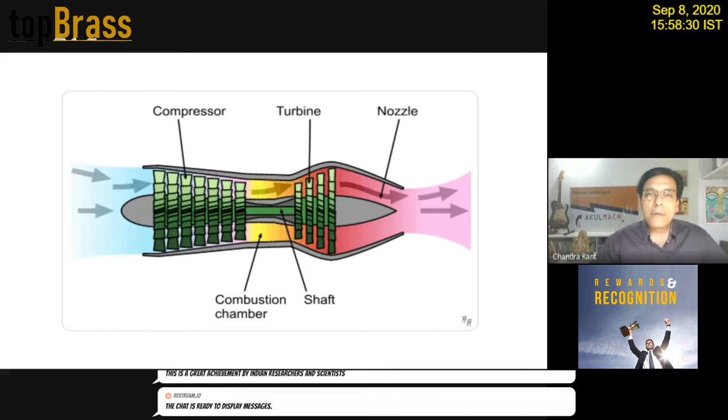How is this speed achieved? But before we go to the hypersonic drive systems, let me tell the viewers that the whole thing is based on something called scramjet. So what is a scramjet? We will come to that in a minute, but let us understand how the normal aircraft turbine engine works. So as you can see here in this diagram, this is a very simple diagram of a jet engine.

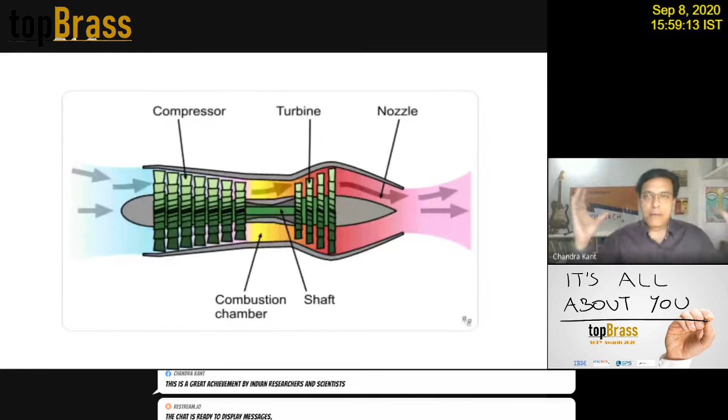It has something called a compressor at the start of the airflow. As you see when you fly using jet planes, there's an engine with a big frontal side as an entry point for the air. So this is exactly what it is.

The air enters from here, and these are the compressors. These fans operate in different stages, and as the air passes from one to the other, the rate at which compression is required increases every time it passes through the stages. So this is the low compressor, and as the air passes through all of this, it becomes high compressor, and the last one is the highest compression. So you can achieve a very high compression of air inside the engine.

Now, as shown in the diagram, there is a combustion chamber. The fuel is injected here and it is ignited. Once the fuel is ignited, it expands vigorously, and hence it escapes from the other side. So this is really the heart of the jet engine, and this is how the jet engine works.

It's a very simplistic diagram, but it has a lot more to it which we are not covering. As the hot air is escaping the engine, there is something called a turbine. These turbines are connected via a shaft with some of the compressors. So they spin the turbines, and once the turbines are spinning, they are connected with this green colored shaft to some of these compressors.

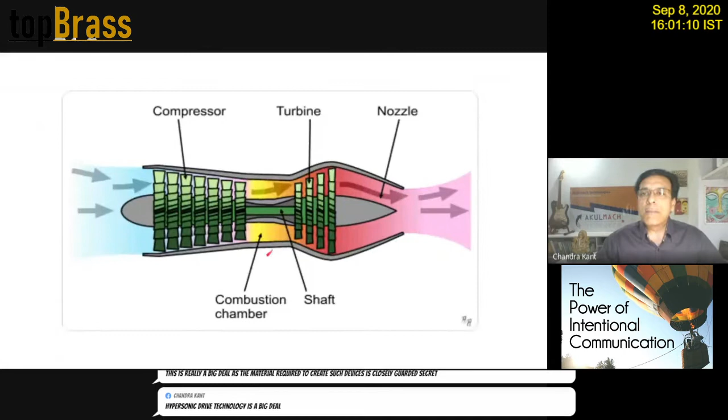So this jet engine, once it attains a certain speed, becomes a self-sufficient system, meaning it does not require any external help. The incoming air gets compressed automatically as long as you keep injecting the fuel and igniting it. The jet engine will keep running once it attains a certain speed. So this is a very simple diagram of a jet engine.

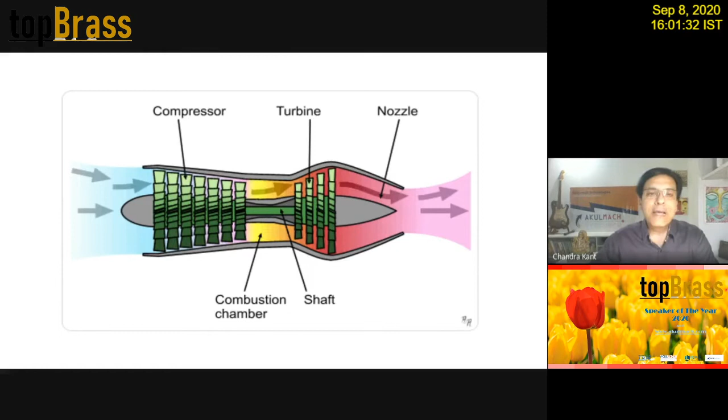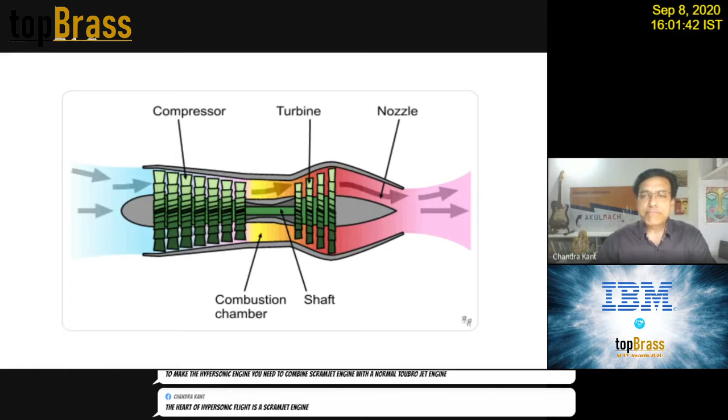Now, a jet engine can take you anywhere between 800 kilometers or 500 miles per hour up to 3 Mach, or 2.5 Mach. Today's jet engines can fly fighter planes at very high speed, up to 2 to 3 Mach. But after 3 Mach, the jet engine cannot withstand the pressure and stress seen at that speed.

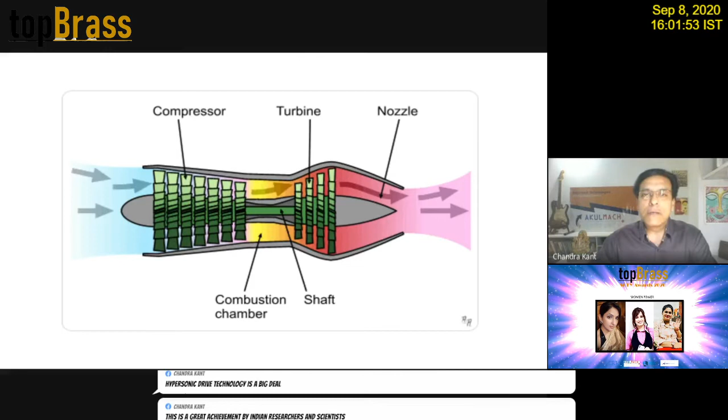So you need something different, and the answer comes in the form of something called a scramjet. Now you would wonder, what is a scramjet? A scramjet is a piece of empty tube which has air entering from one side at supersonic speed. The first requirement for a scramjet to function is that the air coming through the intake should already be at supersonic speed, meaning the air movement itself should be very, very fast.

Once this air is moving inside the engine, which has no moving parts, you just spray the fuel and ignite it. Once the fuel is ignited, it is thrown out of the exhaust at very high speed. So the air is already moving at supersonic speed when it enters the scramjet, and when it exits, it has expanded. A lot of fuel is exploded inside the engine, and it now propels the aircraft at upwards of 5 Mach.

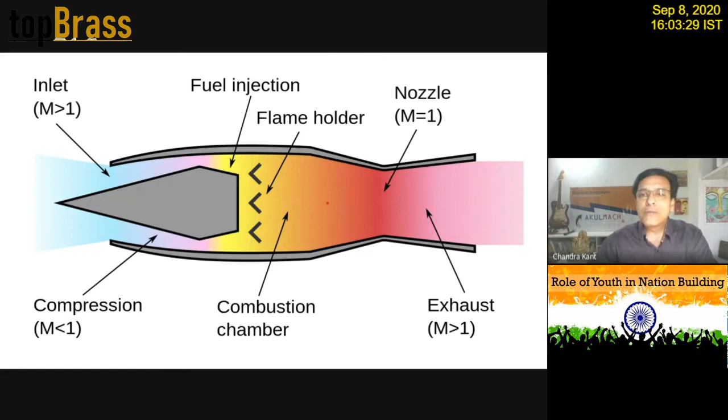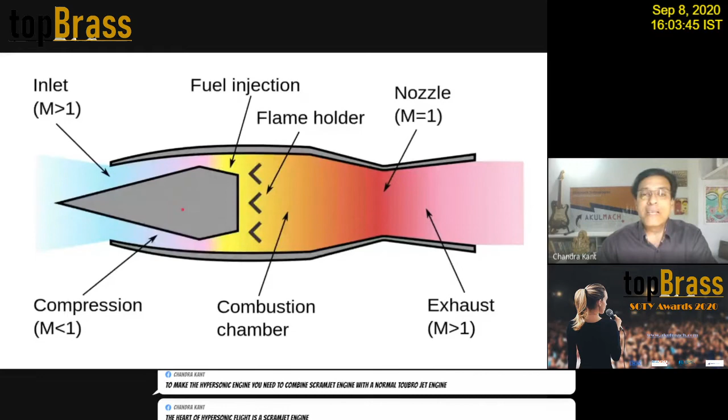So this is the principle of a scramjet. A very simple device, but it requires a lot of things. You can see that scramjet technology has been made by India, and only four countries have achieved this, simply because the material required for building a scramjet to handle the stresses, temperature, and speed at which it flies is a closely guarded secret. The materials, metals, and alloys used to make scramjets are very secret, and none of the countries who have this technology share it with others.

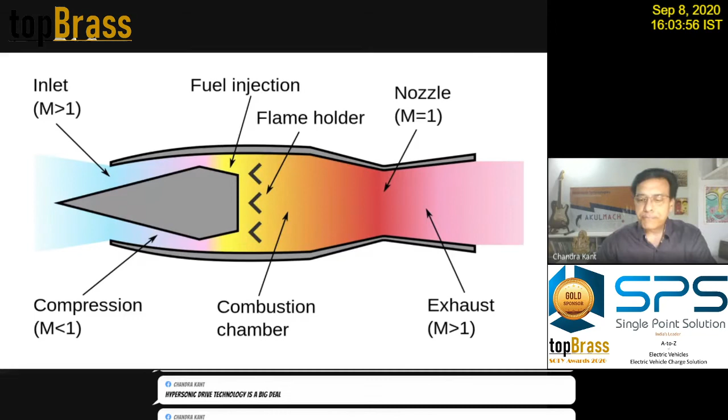So this is really the background. But then, how do you combine things to make sure you have a viable solution to fly?

So once you say that, hey, I know the principle of scramjet, I know the principle of a jet engine. A jet engine is also a very, very difficult thing to make, it's very, very high tech equipment. And now India is saying that we've got hypersonic flight, that means the hypersonic engine is indigenously developed by India.

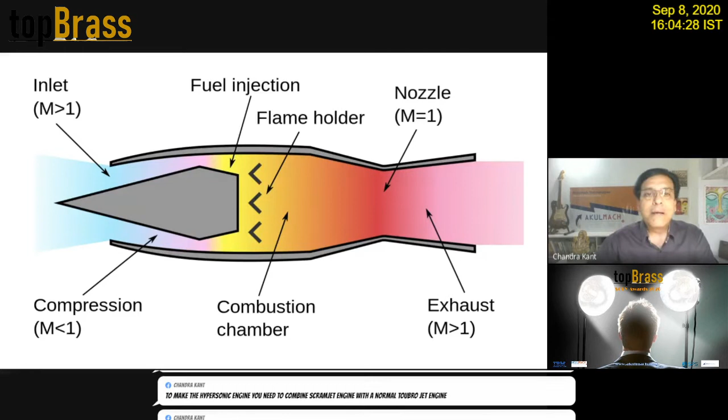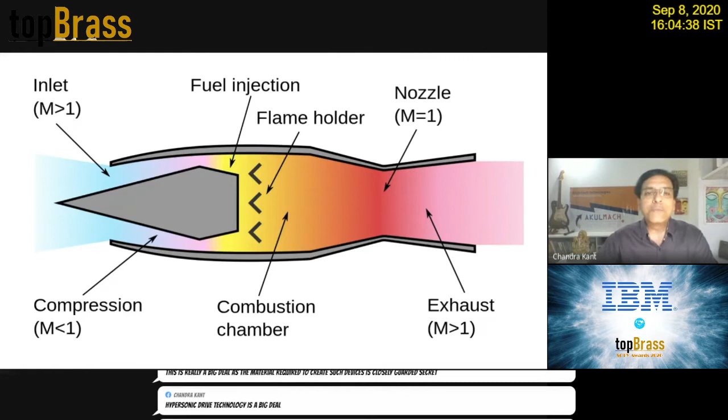So what does it take to make a viable solution? The viable solution is to basically combine a jet engine with a scramjet, and that will ensure that the air, when it enters the engine, is already at supersonic speed to make the scramjet kick in.

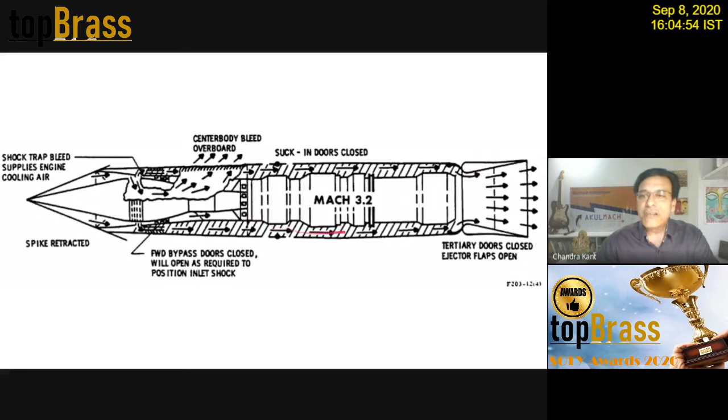So in the next diagram, I'm showing how this actually functions. You see it's a scramjet, a combination of scramjet, and this is the jet engine inside this scramjet. The jet engine is working normally as it would function, that means it has a compressor, it has an ignition, and then it has an exhaust.

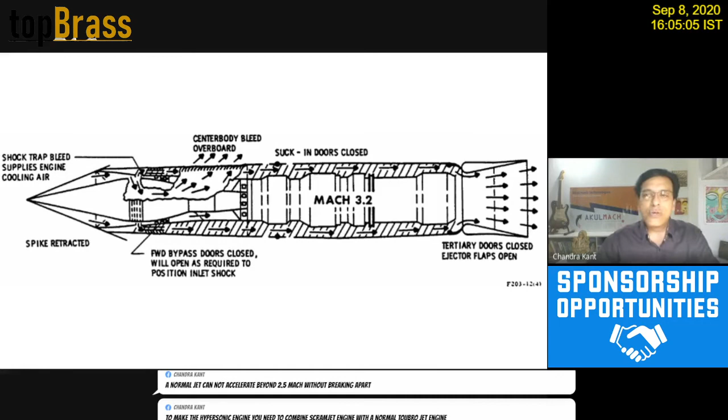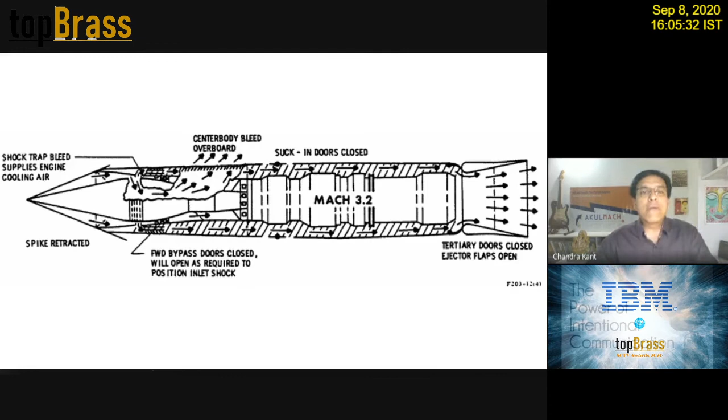The jet engine will fire, take the aeroplane into the sky, and give it a speed of more than Mach 2. Now, when the aircraft is flying at Mach 2, the air which is coming inside the engine is already at supersonic speed, and that is the time when you can kick start the scramjet to propel your aircraft to further distances at a very high speed.

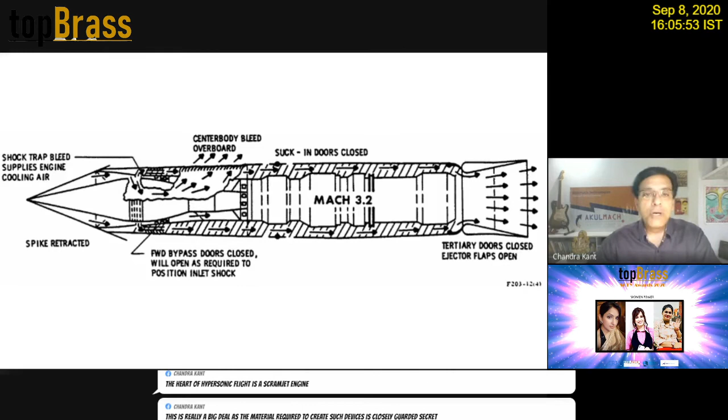So by combining the jet engine and scramjet technology, you can achieve speeds upwards of 5 Mach. People are saying that with the current technology available in the world today, you can go up to 15 Machs. So it is a very, very high speed.

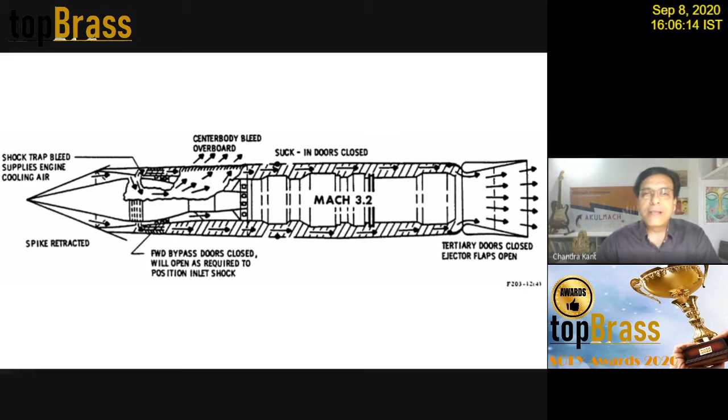Now if you compare that with India as a country, you take a flight from one end of the country to another, it takes about 5 to 6 hours roughly with normal turbofan engines. But if you have a scramjet fitted in your aircraft, you can cover the entire India, length and breadth, top to bottom, in less than an hour. So you see how much time you can save if you have this kind of technology readily available.

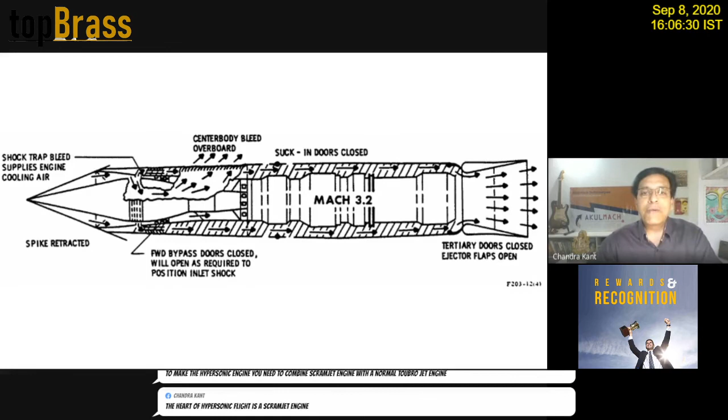And that is why it is such a big deal that only four countries have this, and India became the fourth one yesterday. And this is not something new for the world.

The United States of America has been flying this blackbird, called Black Beauty. It is the fastest flying aeroplane which is commercially produced, called SR-71 Blackbird, and this was basically developed during the Cold War era.

And when the Russians tried to detect it and fire upon it using surface-to-air missile or air-to-air missile, this aeroplane was flying so fast, it did not carry any defensive weapons on board. All it had to do is, when they see a missile coming towards them, they just speed up and escape the missile. So that is really the beauty of this technology.